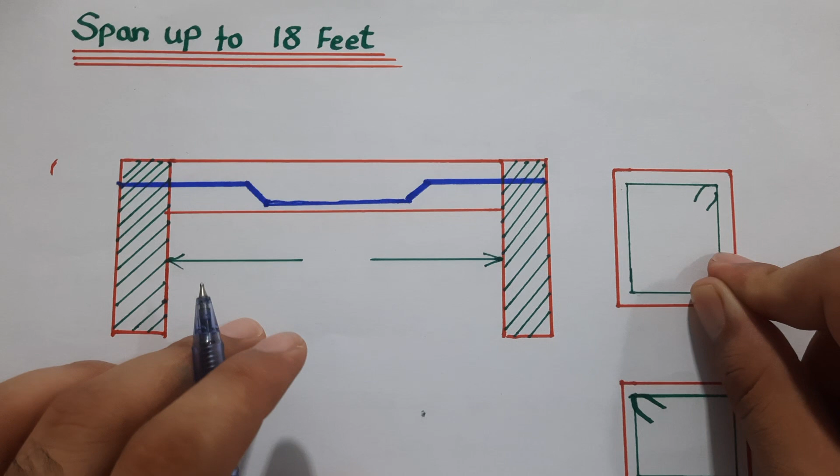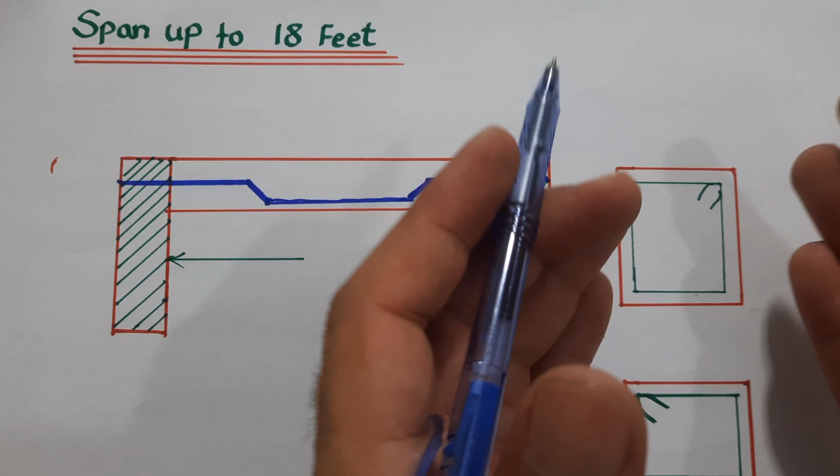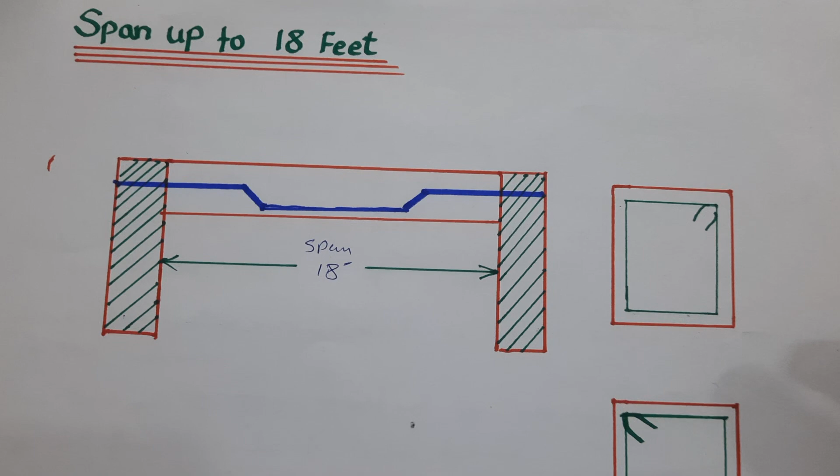Span up to 18 feet. What should be the size of column, size of beam, and inside steel reinforcement details - this is the topic for today. As you can see, these are two columns which act as supports, and the span between the two columns is 18 feet. Up to 18 feet span, the size of the beam should not be less than 9 inches by 12 inches.

This is the size of column. Let me focus the camera. Actually, this is the size of column. So here, size of beam, floor beam - the size of floor beam is 9 by 12 inches. This is only for ground floor.

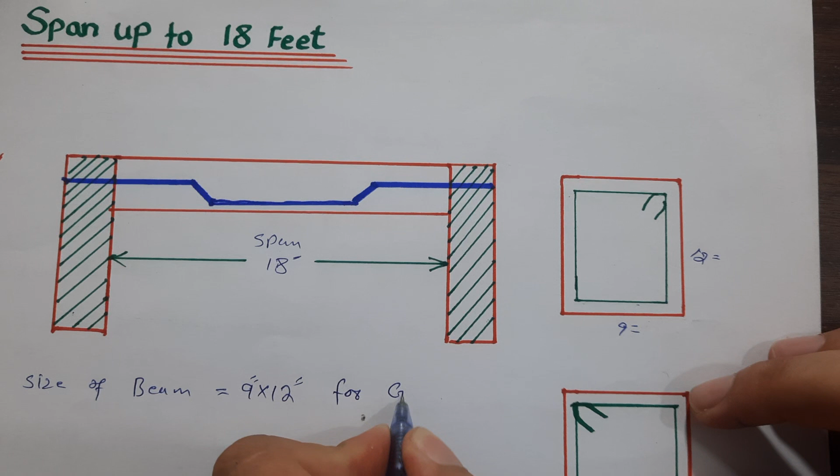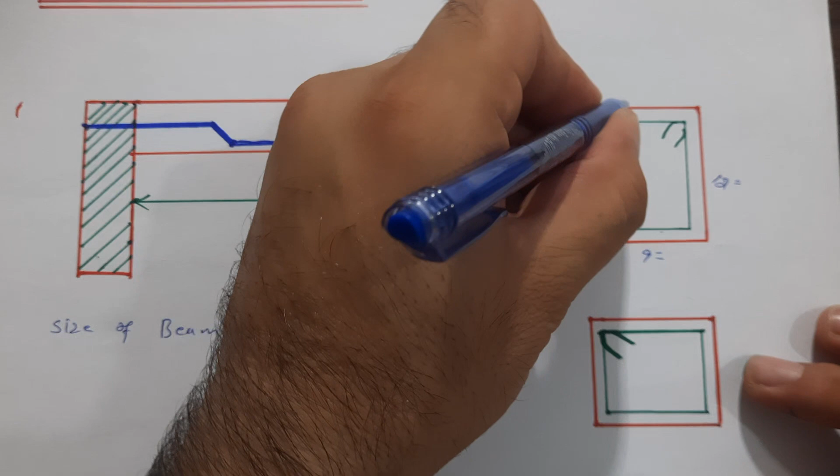These are details. The next one, you can see this is size of column. So this is column and this one here is beam. Let me focus the camera. This is beam, and here this one is column, meaning this is column, and this one is floor beam.

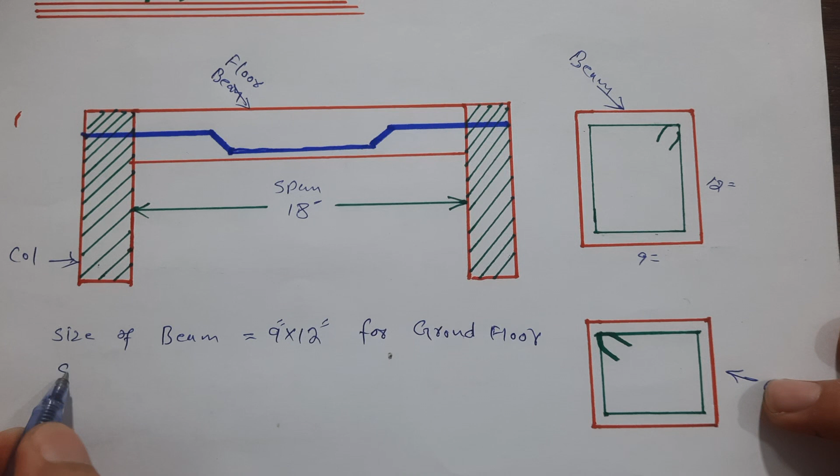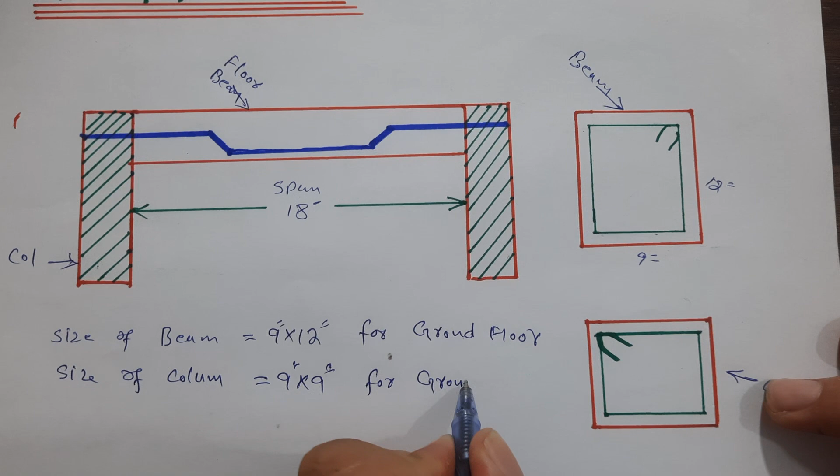Remember, here the second one is size of column for ground floor, should be 9 by 9 inches, not less - for ground floor, not for G+1, etc. So this is size of column, 9 inches by 9 inches.

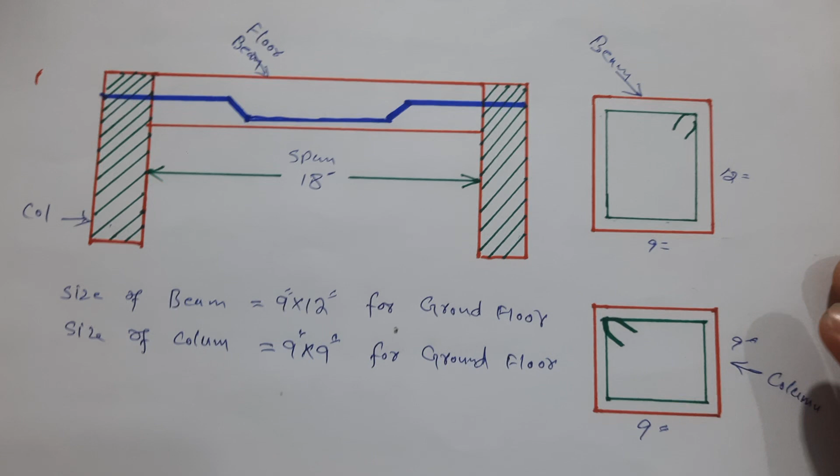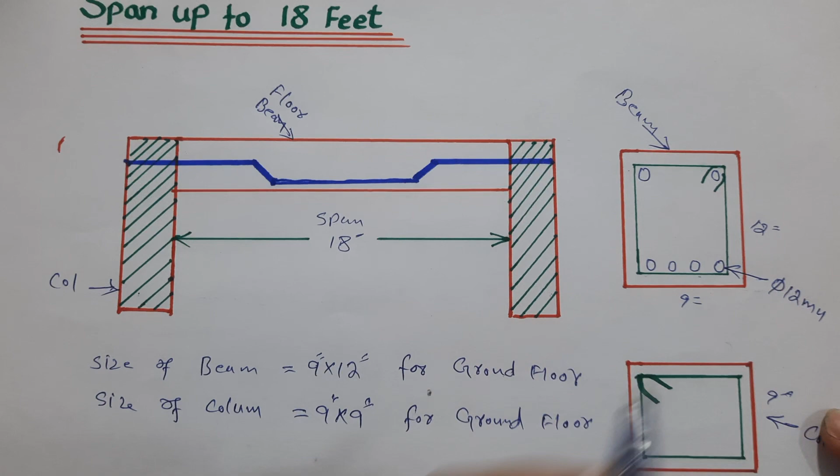Now let me guide you for its steel reinforcement. At the bottom section of beam, you use 4 numbers of bars, and 2 at the top portion for ground floor. If the span is up to 18 feet, the bottom bar steel reinforcement diameter should not be less than 12 millimeter, and the upper portion steel reinforcement diameter should also not be less than 12 millimeter. This is very important to know.

Next, you can see this is stirrup. The stirrup diameter should not be less than 8 millimeter, with spacing of 150 millimeter center to center (C/C). These are its steel reinforcement details.

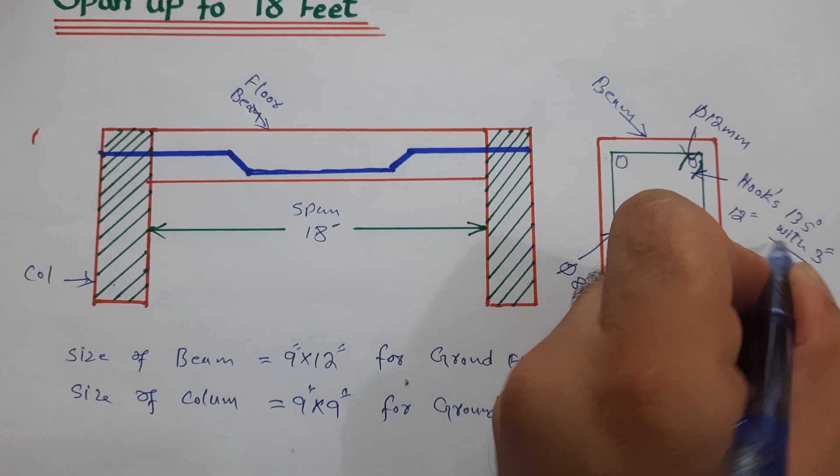Next, you can see this is hook. Hooks should be bent at 135 degrees with 3 inches length - this length should not be less than 3 inches, or you can say 9D, where D is the diameter of the stirrup.

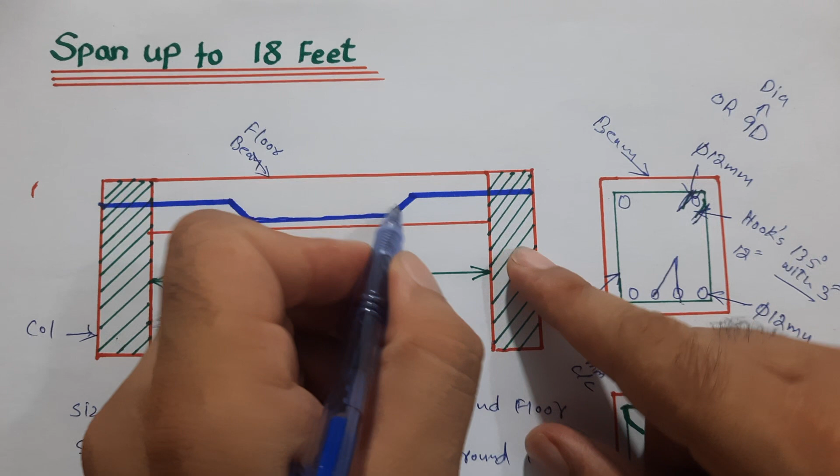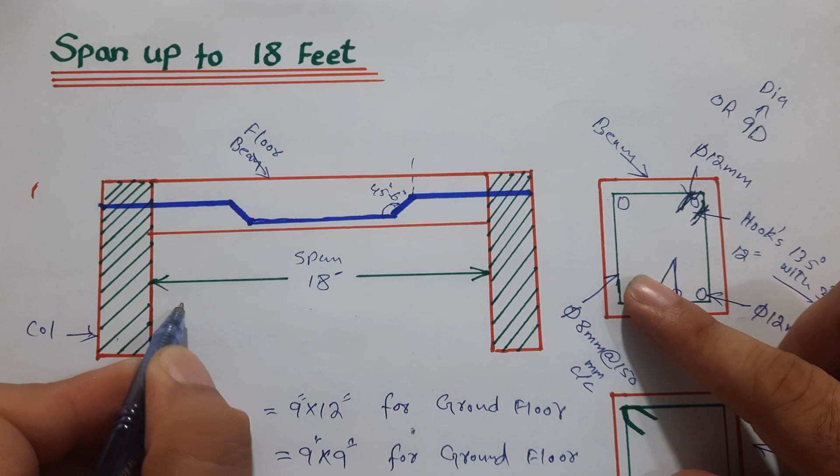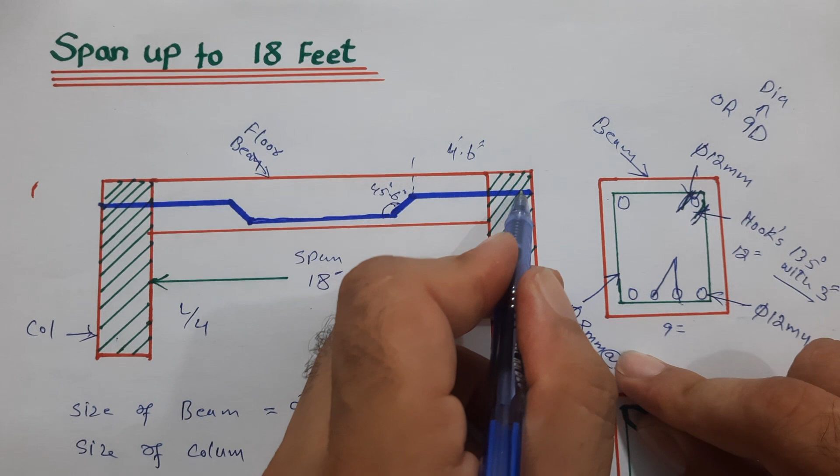Next, let me guide you for these steel reinforcements. The two middle bars should be bent from 45 to 60 degrees - it is called crank bar or bent-up bar, provided here. The span is 18 feet, so L by 4: 18 feet divided by 4 means we require the bend at a distance of 4 feet and 6 inches. At this place it should be bent at the upward side, because here we have negative bending moment.

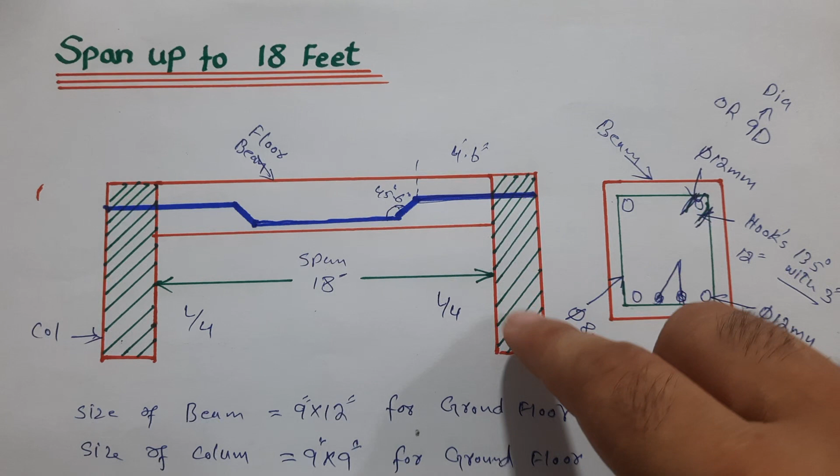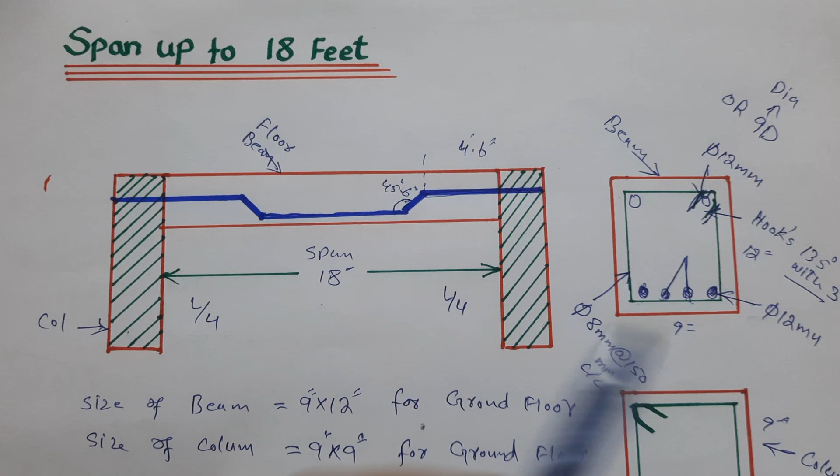To resist negative bending moment, extra steel rods or bent-up bar, or crank bar, should be provided. As you can see, only these two bars - and these are longitudinal bars, all steel reinforcement are longitudinal bars, but these two numbers are crank bars, called crank bar or cranks.

Remember, here the development length should be provided at the end of the beam. These bars should be bent the same way, and for the bottom steel reinforcement, let me show it to you - this one is bottom steel reinforcement, this one you can provide at the bottom, these two bars.

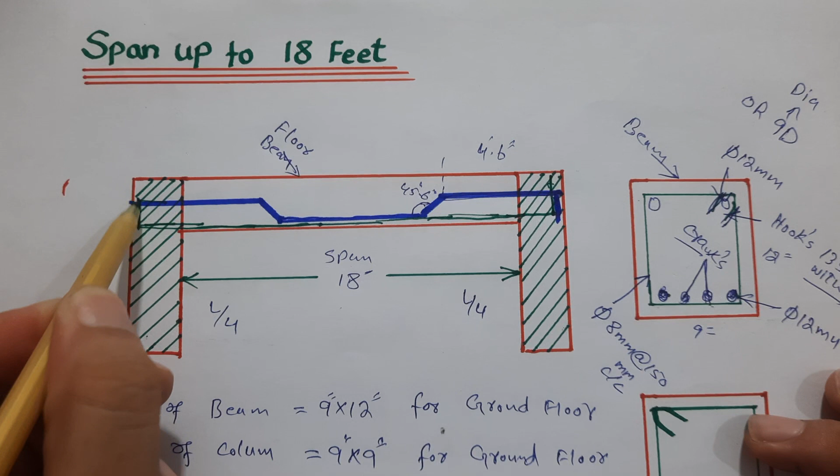So these bars should go to the upward side, so this is called crank bar. This one also will go to the downward side, and the downward should go up to the upward side. This is called DL, meaning development length, which length should not be less than 6 inches normally. This is very important.

Next, you can see these are concrete cover. So the concrete cover for the beam should not be less than 1.5 inches.

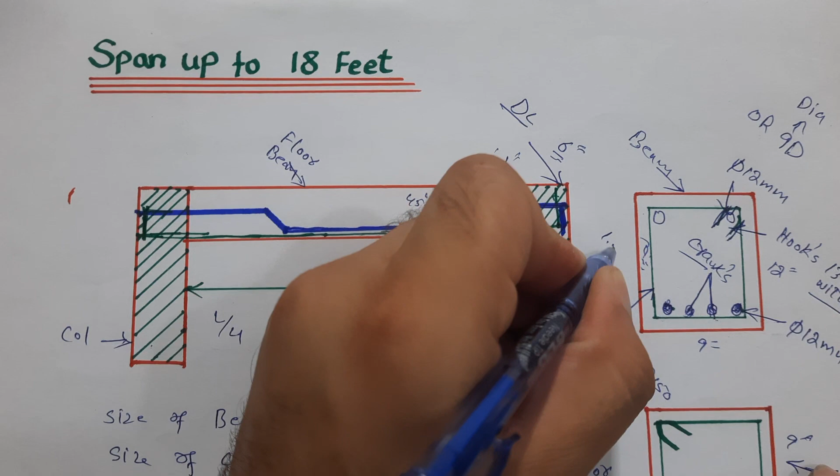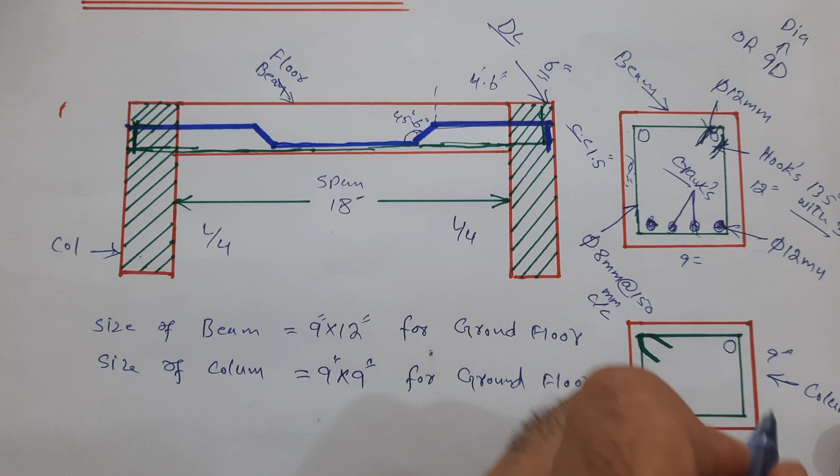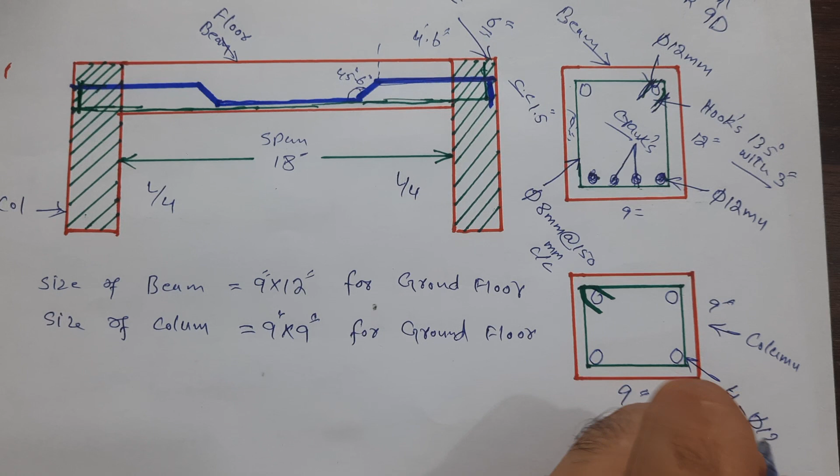CC, concrete cover. Here let me guide you for steel reinforcement in the construction of the column. Used here are 4 numbers of steel rods only, at the size of 9 by 9 inches, and the diameter should not be less than 12 millimeter - total 4 numbers required. Lateral ties should also be 8 millimeter, with spacing of 6 inches center to center.

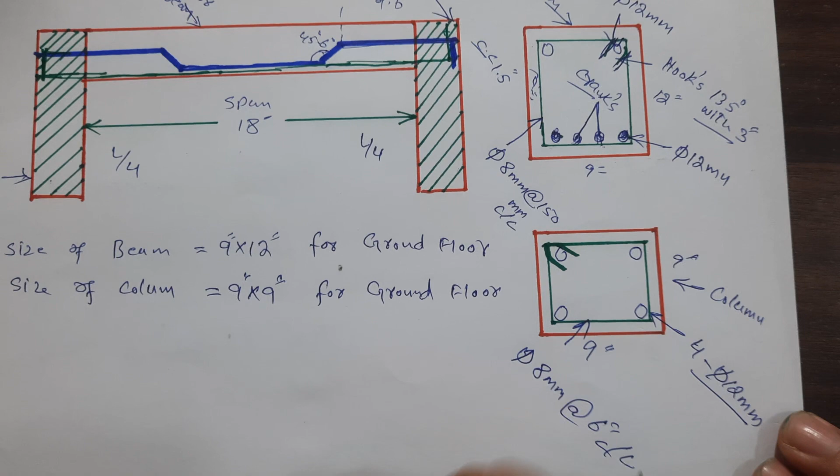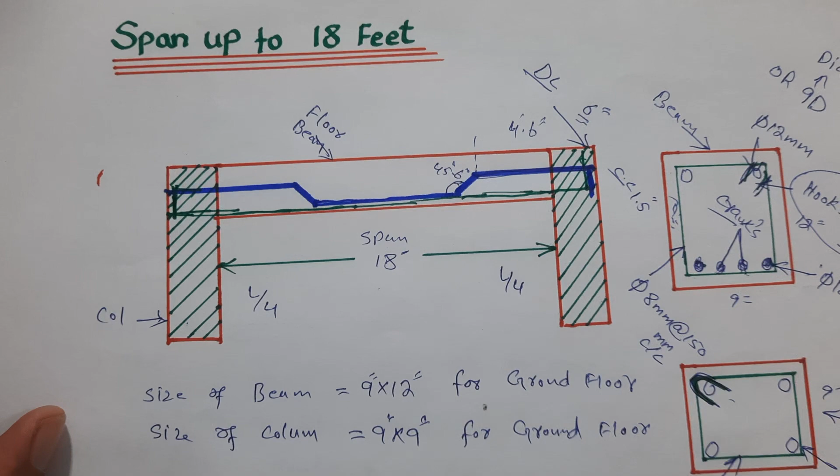This is also important. Next, hooks should be provided at 135 degrees, same as before. The next one, L by 4 is very important to provide because it resists negative bending moment - if you don't provide extra steel rods, you have more chances of cracks at this place.

So these are from my first personal experience, which I did in front of you, and already did this kind of construction at a distance or span between two columns of 18 feet: 4 numbers of bars at the bottom, 2 at the top, only for G+1, not for more, because then we would increase the diameter also.

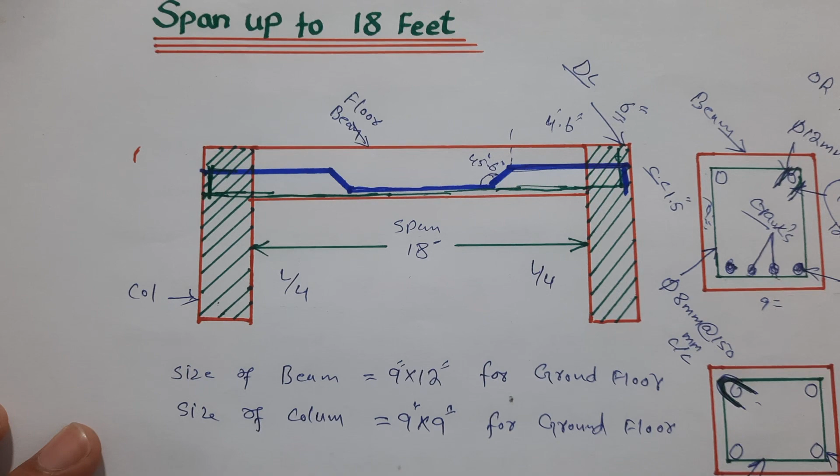But remember also use M20 grade concrete, with ratio 1:1.5:3. This is for both beam and column.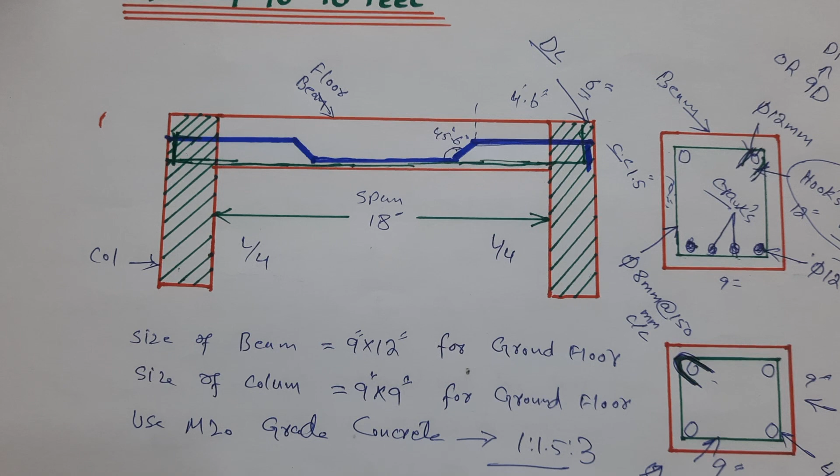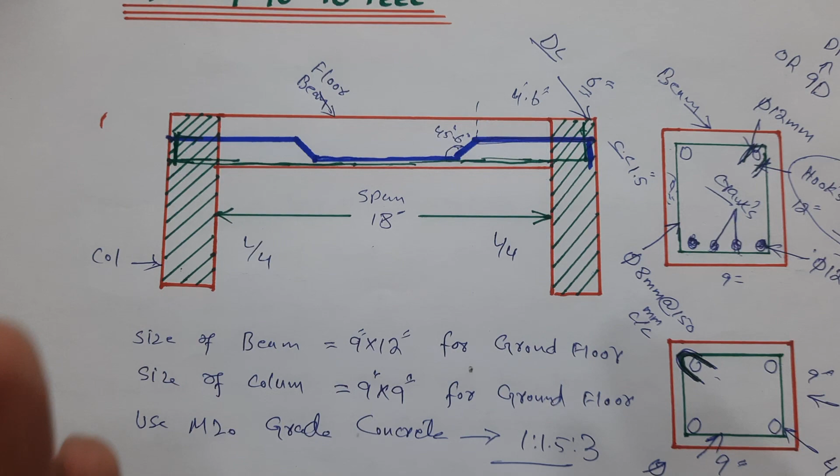For both of them you can use this grade of concrete, which is very compulsory, especially for the construction of beam and column. This is floor beam. In the next video, I will guide you for the plinth beam and its steel reinforcement, also footing details, how to connect footing with floor beam and plinth beam, and what is the purpose of plinth beam - what happens if we don't provide it.

So these are some important tips which we have discussed in this short video. Thanks for watching, see you in next video.